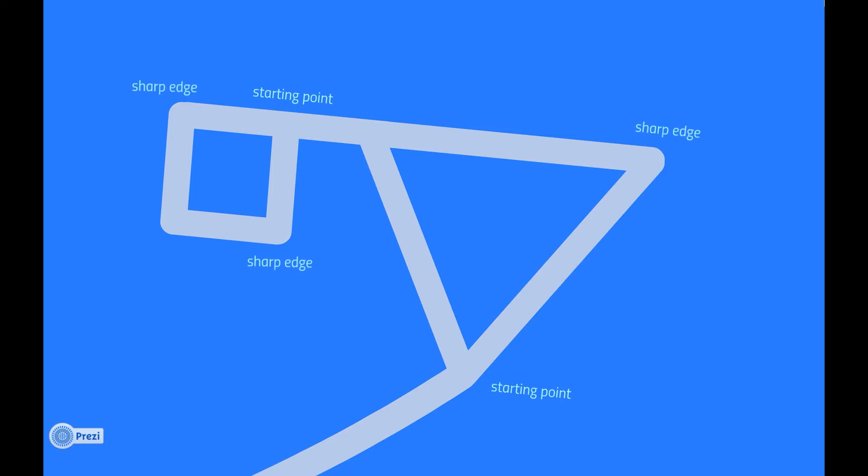Actually, it all started from a circle. A circle is not like a triangle or a square, which need to have sharp edges to rush the drawing line back to the very starting point. Instead, the line of the circle gradually curves back while proceeding, as if it's telling us that anything is possible. You don't need to be panicked about completing the shape, just take it slow.

We want this kind of relaxation while drawing the circle, together with flexibility of the circle itself. And this is how the theme Reflexibility came up. That's pretty much the abstract concept behind the iRoom project. Now let us apply this to the real world. Here comes the real world.

Before everything, let us introduce ourselves first. We are a team of consultants for virtual design and construction and building information modeling. The target space for development is KB526, which is in the 5th floor of the Knowles building in the University of Hong Kong. This room currently is the second largest room in the floor with 180 square meters of space, which can accommodate more than 40 people.

Like all the other rooms, the enclosing perimeter is rectangular in shape. What's special about this room is that it has no supporting columns in the midway of space, so that it ensures a higher diversity for future development. We aim to transform this room into something that can provide multiple uses, including lectures, discussions, and tutorials.

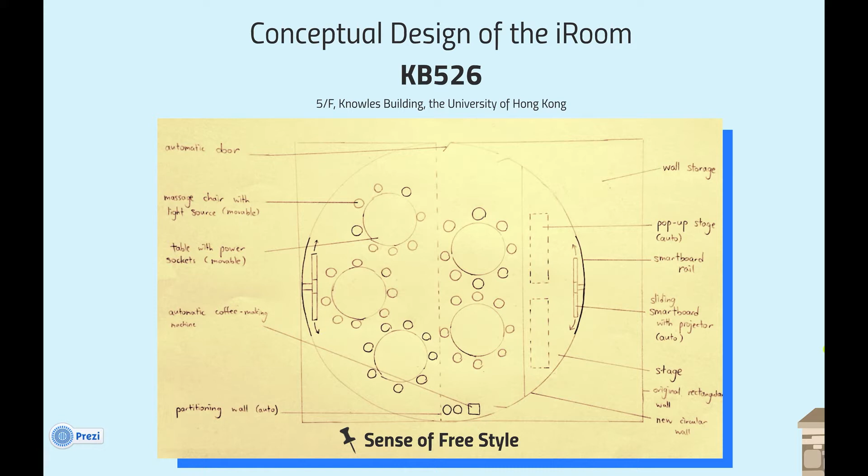Going back to the theme of the iRoom, the first step that we're going to apply it is in the two-dimensional conceptual sketch of the room. The annotated wordings are the functions provided by the room, including the smartboard, which is the most important element in every iRoom. As you can see, there is the original rectangular wall and also the new curvature wall within the space. The curvature allows the smartboard to slide smoothly for the range of half a circle. The details of the functions will be explained later.

Virtual design and construction is the use of integrated multidisciplinary performance models of design construction projects to support business objectives. VDC models are virtual because they show computer-based descriptions of the project. The VDC project model emphasizes those aspects of the project that can be designed and managed: the product, typically a building or plant, the organization that will define, design, construct, and operate it, and the process that the organization teams will follow.

These models are logically integrated in the sense that they can all access shared data. The models are multidisciplinary in the sense that they represent the architect, engineer, contractor, and owners of the project, as well as relevant subdisciplines. The models are performance models in the sense that they predict some aspects of project performance, track many that are relevant, and can show predicted and measured performance in relation to stated project performance objectives.

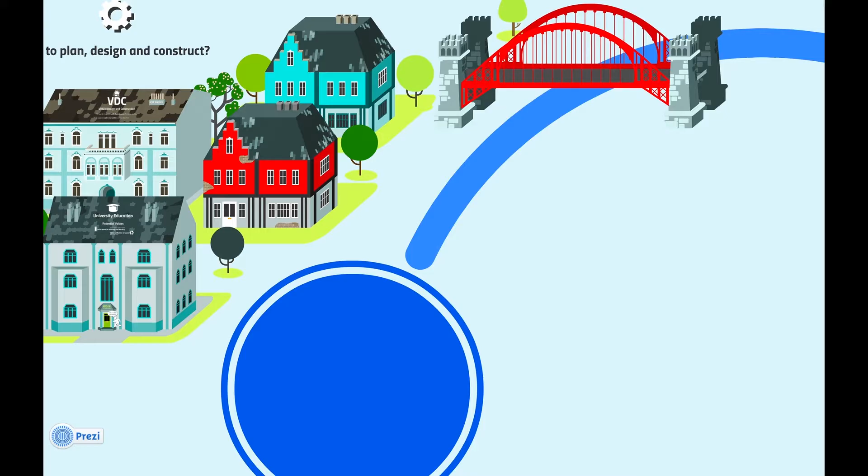Here comes our integrated product organization process model. There are 4 functional objectives of our iRoom, and they are basic services, flexibility, teaching and learning, and also relaxation. For teaching and learning, iRoom aims at providing support to students to learn VDC and BIM, also facilitating students' participation and involvement, and helping provide multimedia demonstrations to our users.

In order to achieve these objectives, in total 6 smartboards of 77 inches are installed in iRoom. Because smartboards allow simultaneous multi-touch function, it is believed that they can strongly help students' participation in lectures and also in tutorial sessions. Apart from smartboards, computers with all necessary software for learning VDC and BIM will be provided in iRoom to help the students to learn them.

Another functional objective is flexibility. All furniture in iRoom, including tables and chairs, are movable. We can separate the iRoom in different ways and allow simultaneous use by different groups. It also supports different types of use like lecture, tutorial, meeting, and seminar.

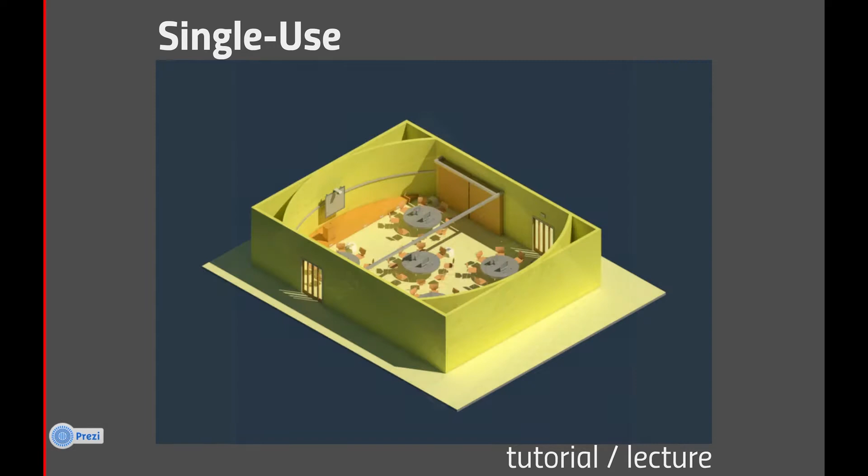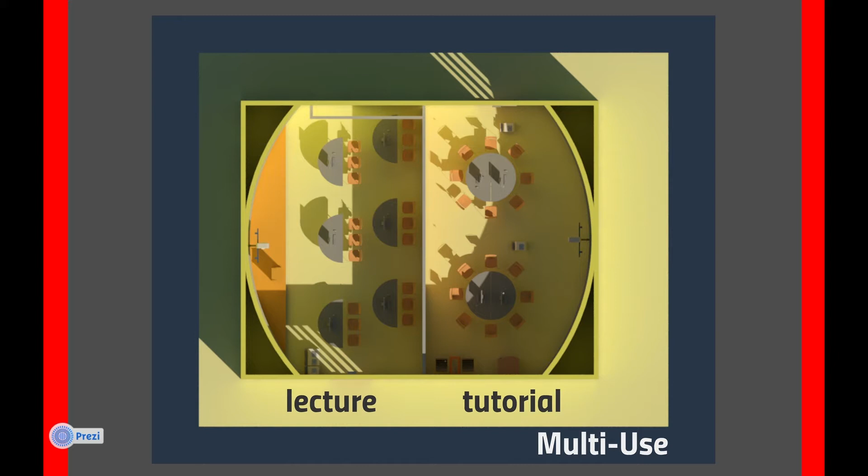This is the POP model, and the elements in flexibility are the partition wall, movable tables and chairs, and pop-up table. You can see in this picture, the setting is the original use. It is for tutorial and lecture. When the partition wall is closed, the room is separated into 2 individual rooms. On the right hand side, it is used for tutorial, and on the left hand side is used for lecture.

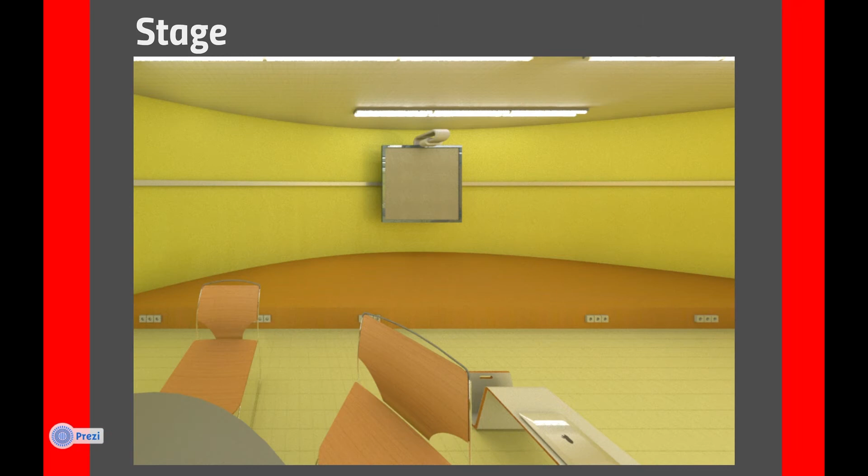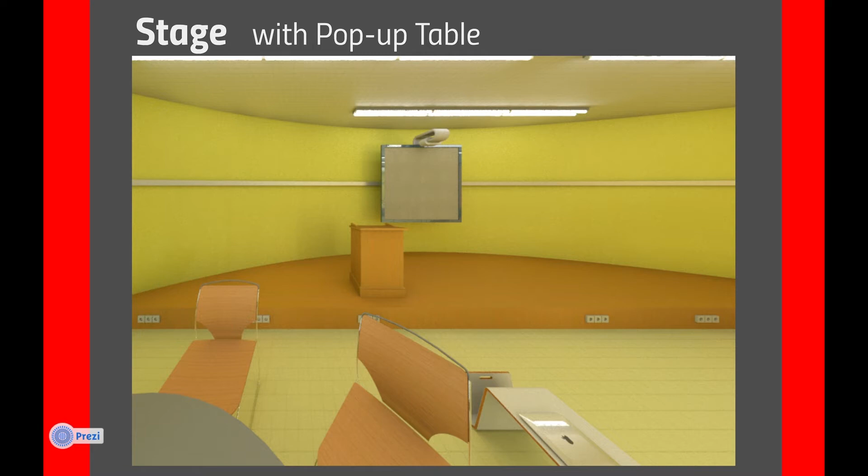The table can also be arranged in any form to fit for the multi-use. This is the stage. There is a pop-up table. The table can hide under the floor, and it will not block the views of the audience, and it can provide more space for the user.

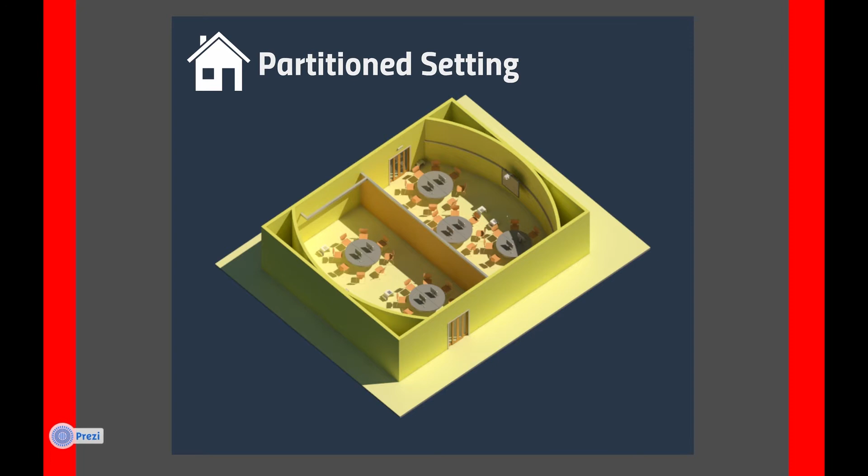Drinking a cup of coffee can help us relax and get refreshed by raising mental alertness. Also, massage chairs can help blood circulation and in turn increase our concentration. So relaxation facilities can help modify the iRoom into a place to learn in a relaxing way.

The last functional objective is basic service. It provides basic lighting to support activity in iRoom. It also provides a comfortable indoor working environment to users by controlling the indoor air quality and temperature. It will also provide basic service and basic fire protection.

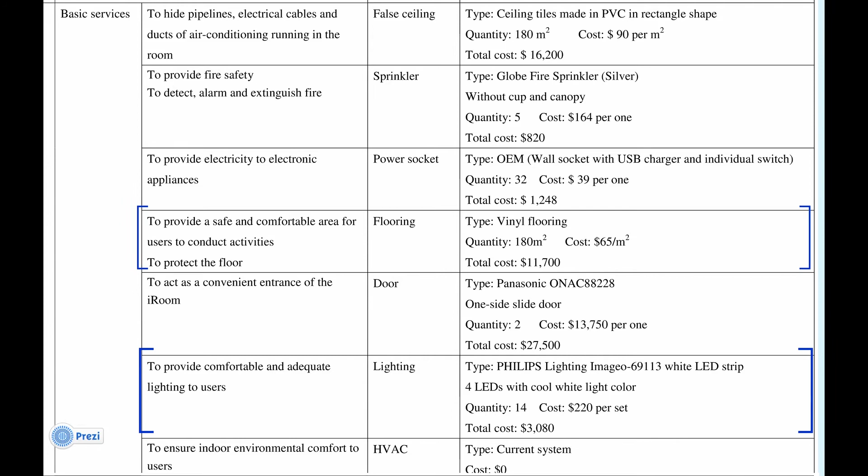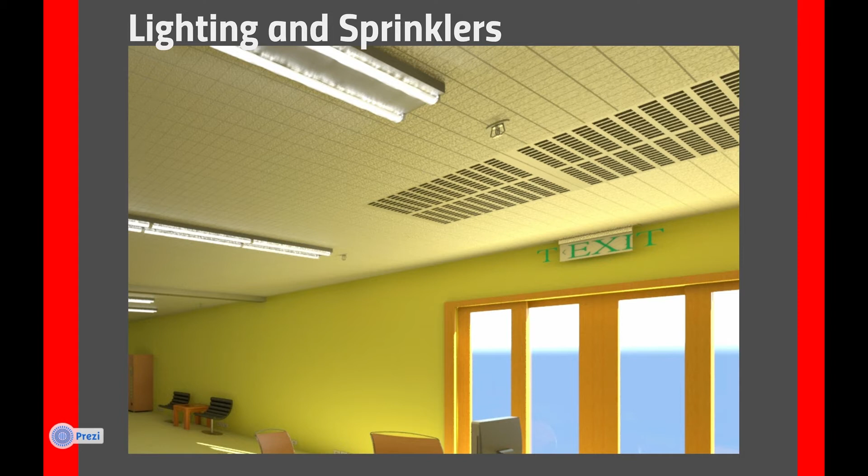You can see in the POP model, the basic service contains the false ceiling, sprinkler, power socket, flooring, door, lighting, ventilation, and spotlight. In this picture, it shows lighting and sprinkler. For the lighting, we will use the Philips Lighting Imageo 69113 model. It will provide a cool white light color, and it is particularly comfortable and has high energy efficiency.

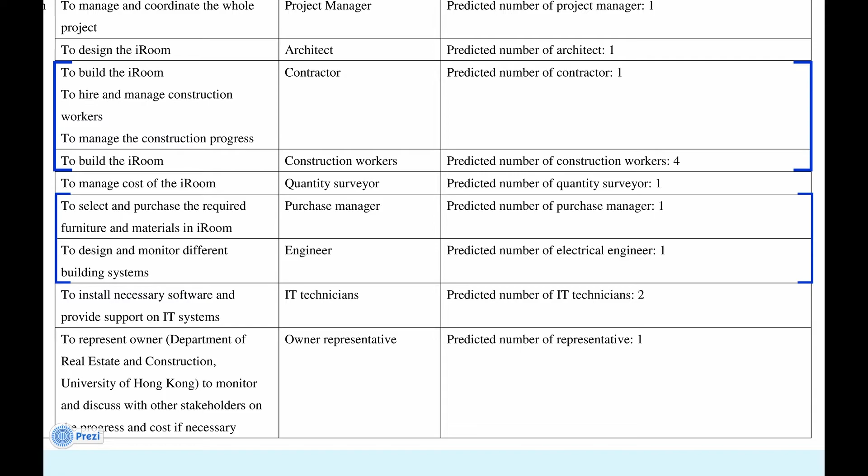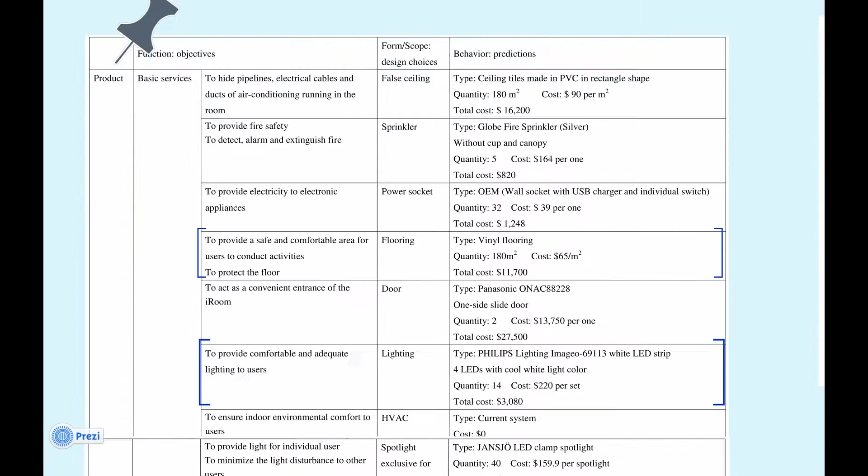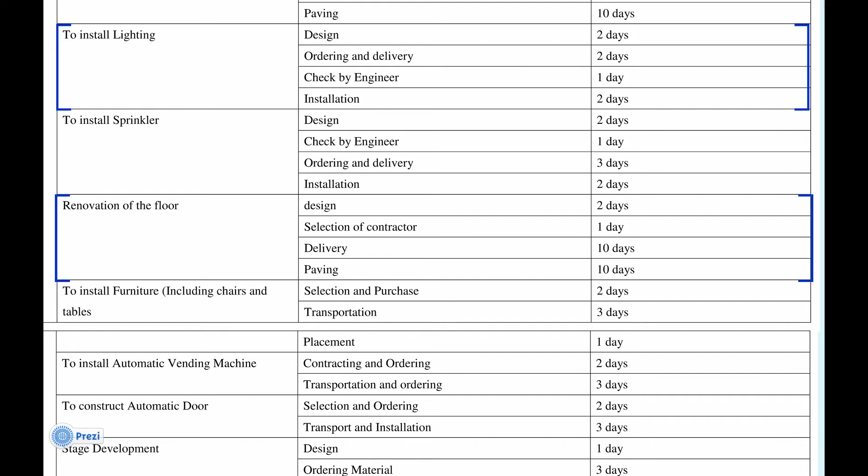Now, let us have a virtual navigation throughout the room. Walk into the iRoom and turn right, you can see the massage chair and vending machine, and this is the so-called relaxing area. Now we go back to the learning zone. Computers are provided in the iRoom.

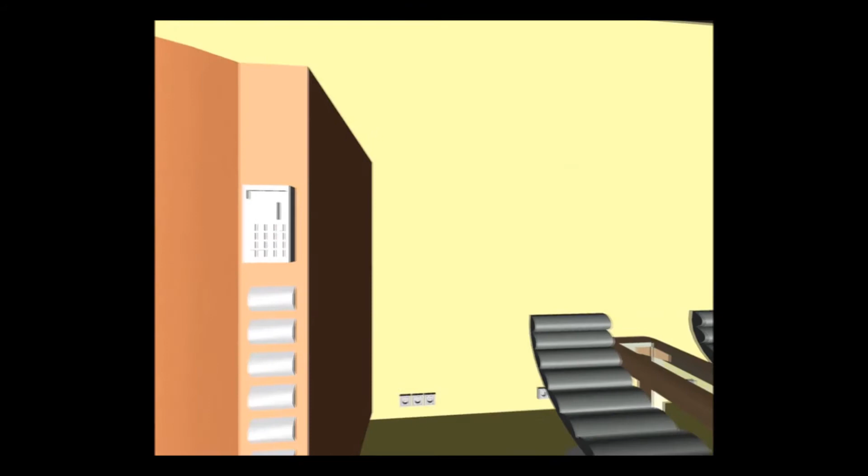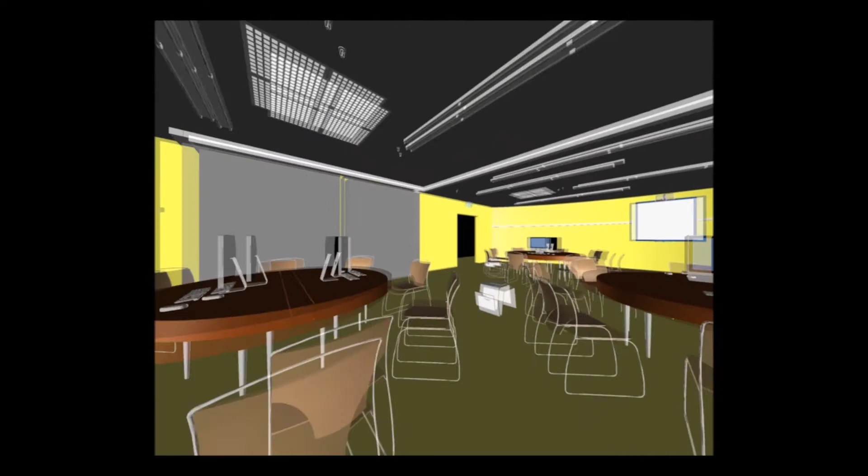The table on the stage could be hidden under the stage when it is not used. And this is the smart board and it could move along the track. There is another smart board provided on the other side, and it could also move along the track too. Another one is provided on the other side of the wall.

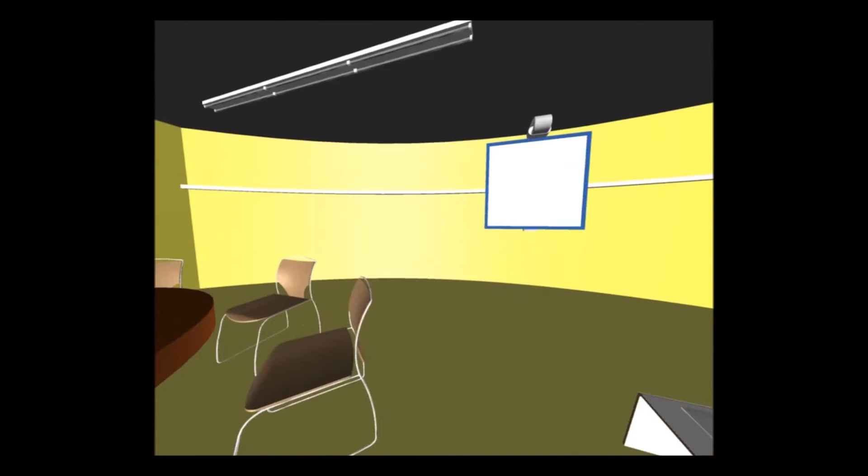Here is the organization chart of this project. We have the project manager who hosts the project, and also we divide this project into several departments. They are design, procurement, construction, and finance. So if we have certain problems, we can contact the relevant person directly, so the problem will be solved as soon as possible.

Here we can see this chart, the Gantt chart. It shows the start and end time and the period. We will start from the 2nd of June to the 13th of August. It lasts about 53 days. We can see in this calendar that the end of the semester, the second semester 2014, is the last day of May, and the 2nd of June would not make any delay in the lectures.

And there are 2 weeks which will be the buffer of the construction. This is good because we don't need to make any delay in the next semester. This is about the gap. Before the gap is the design and transportation of all tasks. After the gap is the installation. Therefore, we can carry out all the tasks on track after the critical task immediately. This definitely saves time and cost.

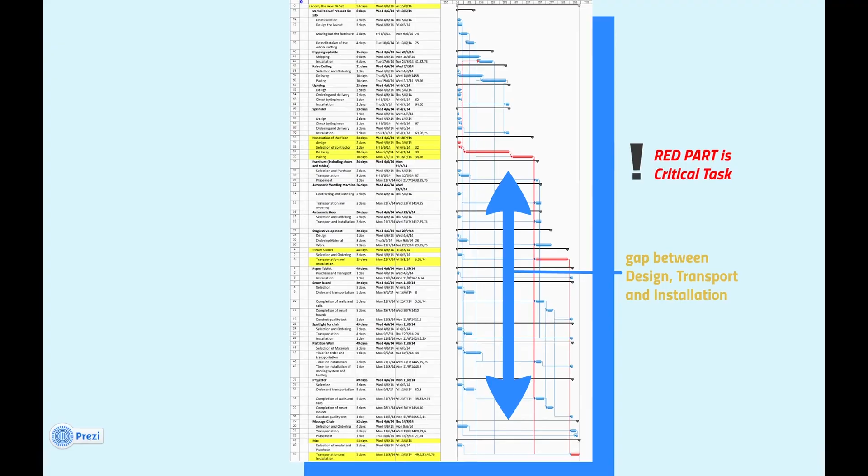Next part is about the procurement method. We will introduce the fixed price and lump sum price strategy. As fixed price, we don't need to use extra workers or time to monitor the time and cost. Also, iRoom is not a very large-scale project. There's no need, like the residential construction project, for the developer, and we believe that Hong Kong can pay it once only. The cost is about 700,000 for the material cost.

For the drawings and specifications, we are making an education area with a specific purpose. We have to ensure the objective is achieved. Therefore, drawings and specifications are far better than the bills of quantities, which is just a lump sum of some numbers. We think that this method is better for tendering to find the ideal contractor.

For the traditional contract, we have in-house consultants and we are the employers. The contractor should not have too much control in the project, as we decide the part and we know how to achieve the objective better than them. So design and build, construction management or other management contracts should not be adopted, and we use the fixed price, drawings and specification and traditional contract in our procurement method.

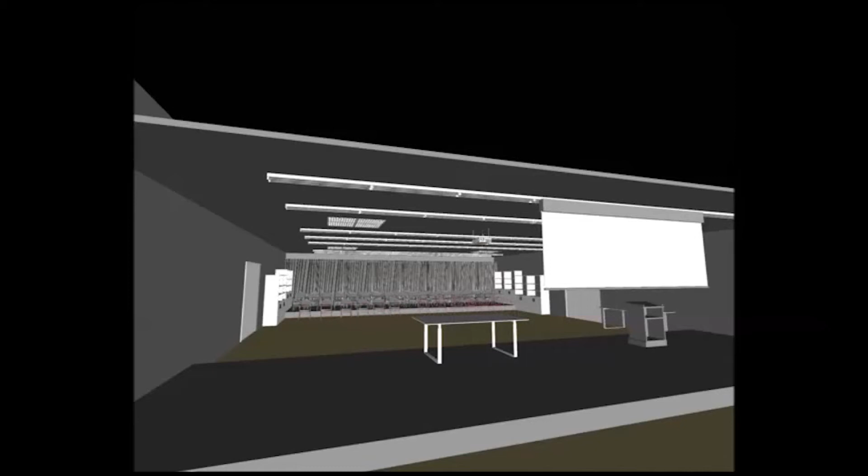Now, let us show you a more progressive expression on how to demolish and construct the iRoom through the 4D animation. Firstly is the demolition of KB526. The sequence of demolition and construction is a point that must not be overlooked. This is a vital factor that needs to be considered as it affects both time consumption and flexibility of the project. Some inappropriate arrangement may affect the efficiency of the construction work.

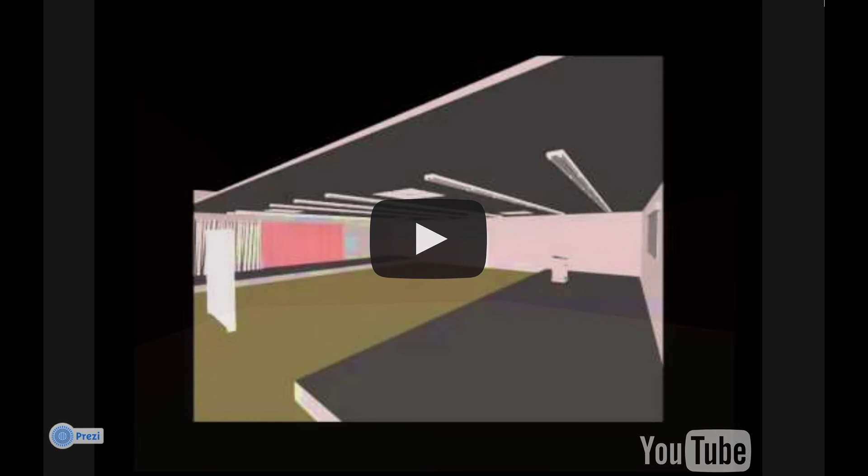For example, it is impossible to install the smart board before the track is placed. Also, placing the movable wall before installing the track for the wall would bring huge inconvenience to the installation work. Therefore, an appropriate arrangement is required. Then, let's move on to the construction of iRoom.

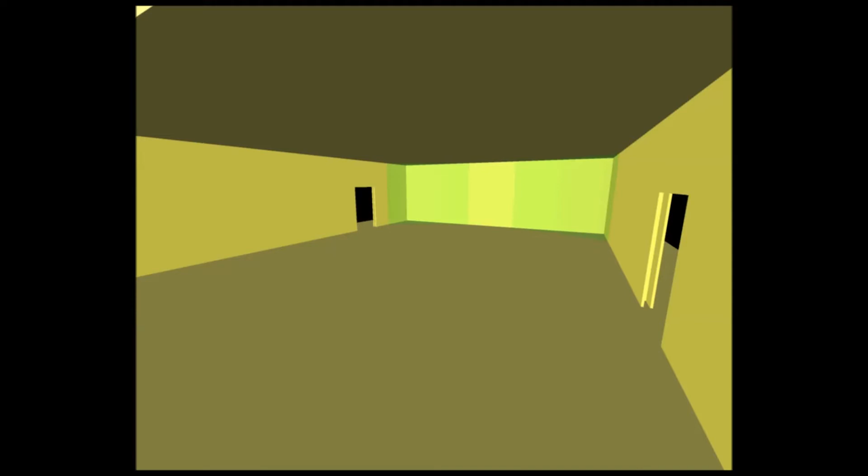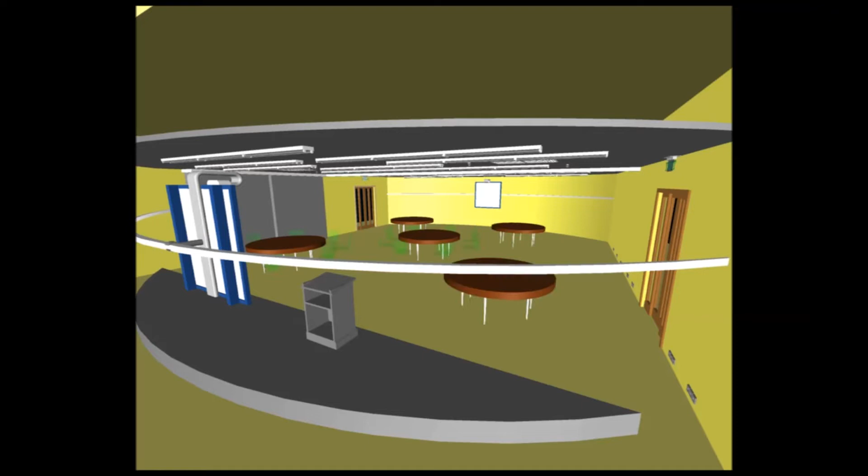Basically, the arrangement is designed based on the degree of easiness to remove or install. All the works could be classified in 3 categories: furniture, building surface and structural elements. In demolition work, furniture will be removed in the first phase and then building surface. And for the construction work, the order of installation will be the contrary. Structural elements like the circular wall will be installed in the first place.

And now we come to our business purpose. At the early stage, we have built up the POR model, 3D BIM, Gantt chart, and 4D animation. Since we have mentioned that we have in-house experts and professionals, we put our minds together at the early stage to obtain an overview of the project for the POR model, in order to identify and integrate what to build, the level A element, the most important one, and the level B element, less important but fundamental, and identify the responsible parties, schedule, and procedure in the whole project.

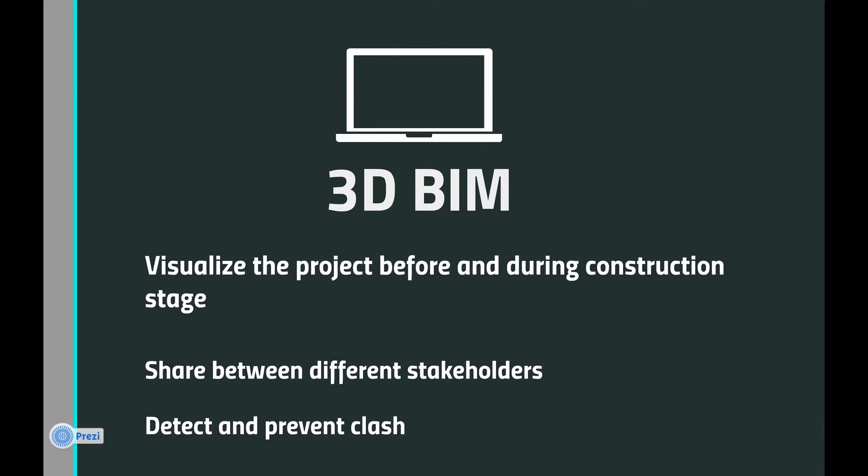And for the 3D BIM, we would like to visualize the project before and during the construction stage, shared between different stakeholders. Clashes can be detected and prevented. For the Gantt chart, we would like to predict the duration of the whole process according to the critical path. And for the 4D animation, we would like to visualize the whole construction process for the purpose of better coordination and exchange of information. And for the organization charts, we would like to identify the responsibility of each stakeholder in the project and their contractual relationship.

Finally, for the overall benefits of all models built, with the clear objectives and goals obtained at the early stage and provided to all stakeholders, this will definitely enhance the information sharing and communication between different stakeholders, and then facilitate the project management and efficiency, and this will predict and prevent potential clashes to save time and rework cost.

Here come the potential risks and problems of the project. The potential risks and problems of the project include performance not meeting the design and requirements of the owner, uncertainties on availability of materials which may cause delay, conflicts between stakeholders, and fluctuation in costs. The people who address the problems include the project manager, quantity surveyor, purchase manager, and contractor. The project manager, who is one of the decision makers, compares and decides different products, monitors the process of the project, and settles conflicts between stakeholders.

Here come the adjustments in modeling and analysis. The model should be kept updated as the project goes on, especially after new decisions are made. Moreover, buffering time can be taken into account. Buffers are added to tasks which may have inherent uncertainties, which lead to variability. This reduces the chance of delay in completion of the project.

Contingency plans can also be made to mitigate the risk. And last but not least, a contingency fee can be included in the budget, which is used as risk management to financially prepare for any risk associated with the project.

The iRoom is not merely a renewed space that provides a place for people to stay. Of course, it has the potential values like enabling more courses to be held and better utilization of space mentioned beforehand. However, actually, it's more than what you think. It is a work of art crafted by heart, meaning that it's a medium enchanted with a message. We want to convey this message to all the people who know about it, and this message is inspiration.

Rethink everything around you. Don't get used to the events and objects that are around you all the time. A table does not necessarily have to exist in this form. It's just that you see this kind of table everywhere in the university every day. The formal dress code need not apply to every group member during a presentation. It's just that every group either wears formal dress altogether or none of them wear it at all.